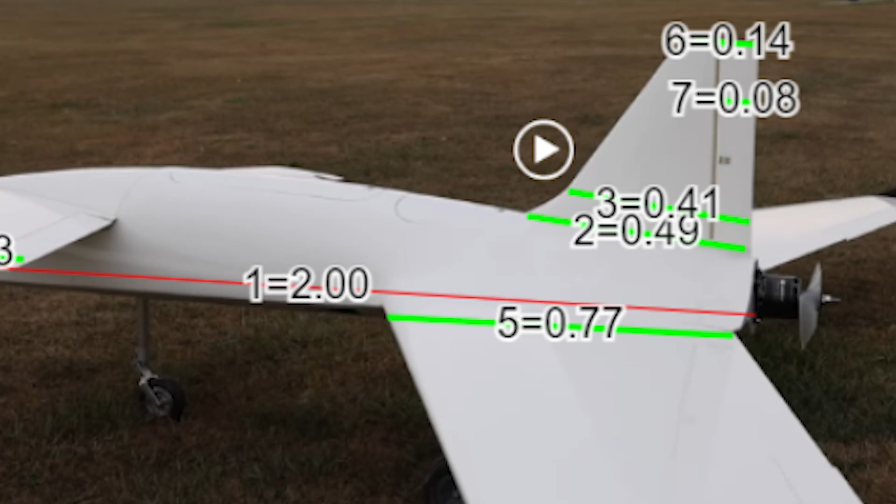Welcome to week 2. This week we are going further into the aerodynamics of this drone. Here's a very quick recap of week 1. I figured out which airfoil I should use. I went over the different drone designs and picked this one. I did some research on which electronics I should be using, and I handed all of this over to my friend Jordy, who is currently designing the drone in SolidWorks, which looks like this right now.

Today we will be finding out if this game is a cheap alternative to testing aerodynamics, if it will save time compared to professional programs, and how accurate it really is. Alright, it's time to start my very first investment ever in this company drone idea. This is a very official moment. Alright, I'm paying right now. I think I paid. Oh, I didn't pay just yet.

Let's make a new aircraft. I saw a lot of reviews of people on Steam that said that they took 2 days at least to learn it because apparently it's quite complex. Now it didn't take that long. I ended up only needing 2 hours before I started working on my actual project. The only issue with this game is that if you ever want to use this as well, be aware there's no Ctrl-Z, and that's really annoying. And it's a little bit buggy because it's in beta.

So you guys kind of understand what I'm doing here. I was trying to rebuild my actual drone already, the one from the intro of this video. And this is what it's currently looking like. So that should tell you how terrible I was at this stage, but trust me, it'll get a lot better. It was actually starting to look a lot more like the drone than it did before. So to be honest, without a tutorial, that's still quite impressive to me.

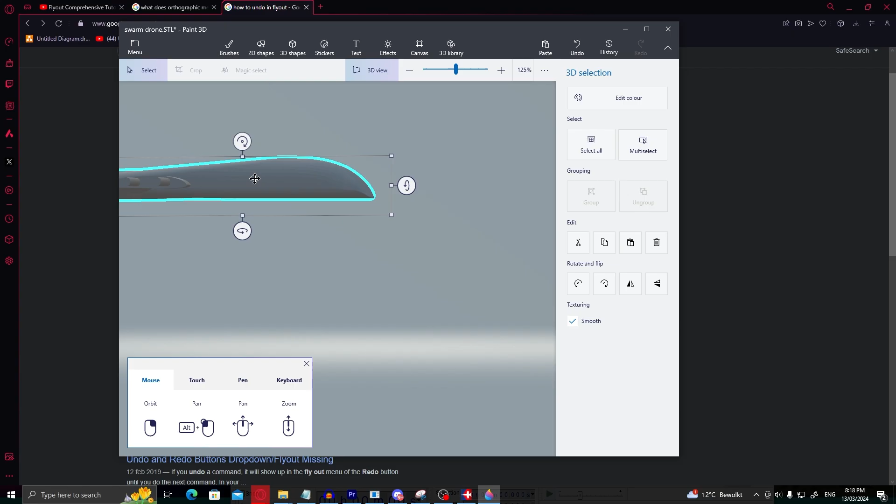So, whilst watching this amazing time lapse, I want to tell you about the other huge amount of progress I have made alongside this. And this was mostly possible by two amazing guys that reached out to me. Last video I asked people with experience to send me an email if they would like to help out, and of those 400 viewers I did get, 2 people reached out.

One of the guys is an Australian guy called Josh, and he was fascinated with UAVs as well, and because of this he gathered a ton of knowledge on this field and he generally knows a lot. He also has access to a few tools like 3D printers, and he has some experience using a CAD program.

The other guy is from India. He is at an engineering college and they have an RC plane club, and he's like the leader of that club. Together they've designed an RC plane and it looks pretty advanced. This guy has a very deep understanding of aircraft aerodynamics and physics. He also has 5 months of SolidWorks experience, and the combination of these two guys helping me out saved me so much time and allowed us to make so much more progress with developing this drone.

I will not keep you waiting though, so here's what we did. First, I introduced them to the project and showed them what I had already. The Indian guy recommended the Australian guy a professional wind tunnel program that he then downloaded. And I told him I landed on the Clark Y airfoil in the last video. Make sure to check out that video if you want to see more in-depth information about how I got to that airfoil.

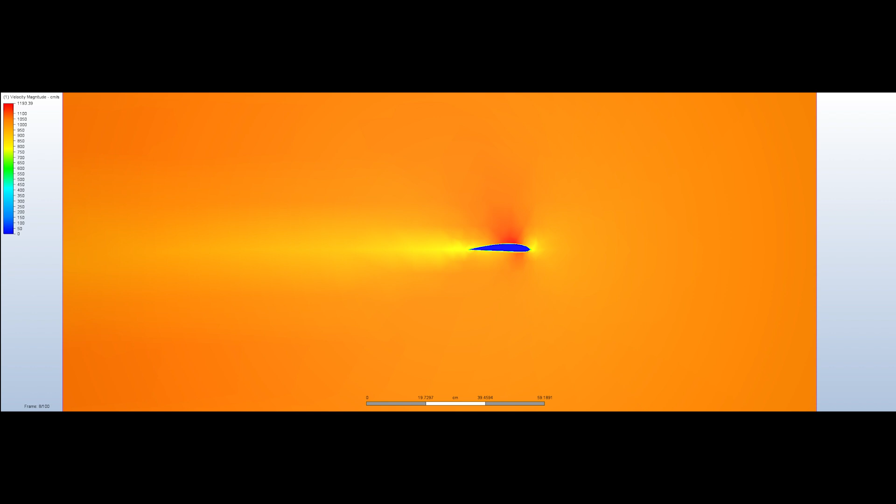And he put it inside of that wind tunnel program. Now, to me, these graphs are a little bit complex, but I think red is faster wind and blue is slow wind or drag. So this is the airfoil at an angle of attack of 0 degrees. The wind tunnel was flowing at 20 knots, which is 37 kilometers an hour, and for the Americans that's, I don't know, 3 yards. So the results weren't so great.

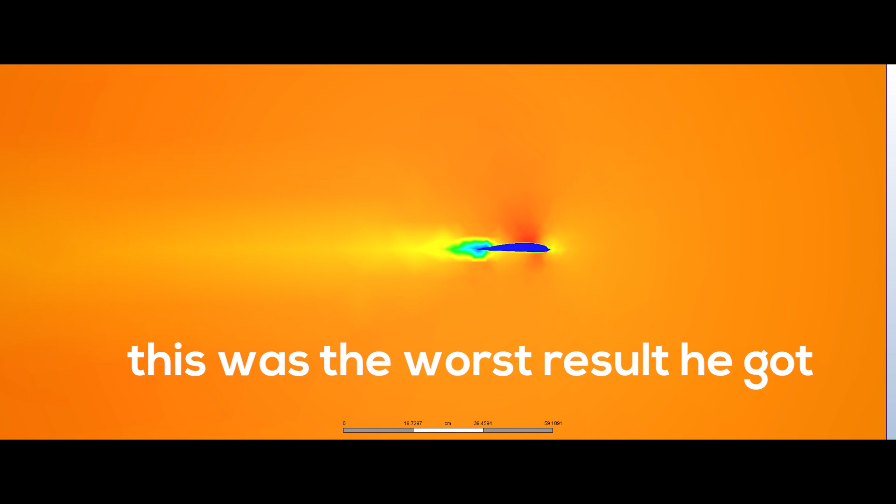1.8 Newton of upwards force and 1.49 Newton of force in the x-axis, and I think that's drag, but I'm not entirely sure. Wait, let me ask him. Okay, yeah, it's probably drag. So then he changed the angle of attack to 7.5 degrees, and he already figured out the Clark Y airfoil needs a pretty high angle of attack, and that was confirmed right away, as that performed about 5 times better with 8.9 newtons of lift and the same or slightly less drag.

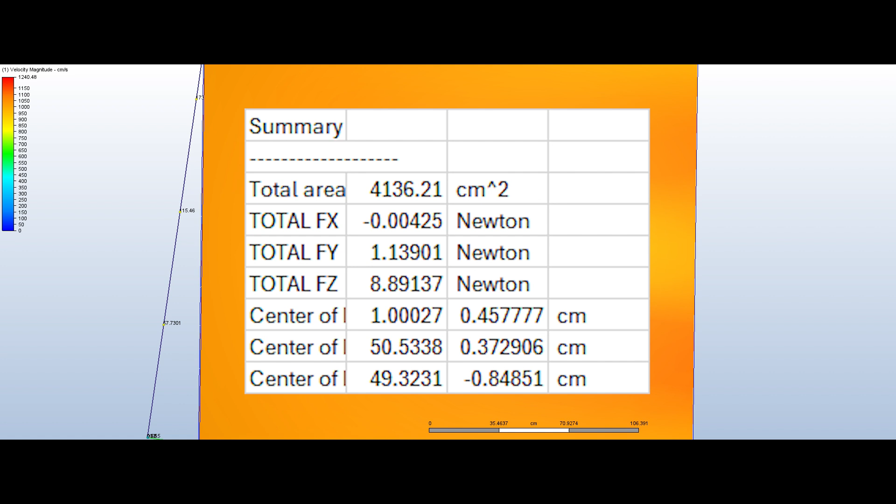The airfoil he simulated was 1 meter long with a chord of 200. So then, kind of as a proof of concept, he printed out a sample of a 100mm chord and a 250mm span and tested it in a wind tunnel, but it's kind of a makeshift wind tunnel. He just took a blow dryer and attached a string to it, and then he put the wing in front of that, and you can see the string really going down. And it's really cool to me that you can really see the force that is created by an airfoil. This way he was easily able to test out good angles of attack, so that's honestly amazing.

So after adding all of those measurements, I started adding a motor, and luckily they have an electric motor in this game, which is quite nice, and you can set the RPM and the torque, and also different blade types, and I don't know which one does what exactly. I still need to do research on stuff like that, but I just chose a random one.

Now to make the rudder real quick. I did the rest of the entire plane basically by guessing, by the way. I didn't use any measurements for the rudder. I did use that blueprint with the estimated measurements, but it ended up looking way too big compared to the real thing. So later on I just made it smaller, as you can see. Same for the front wing. I just had no idea how long it should be, so I just did something. So I added a few control panels, and I also just guessed it. I'm pretty sure that control panels are pretty precisely placed, and I didn't do that.

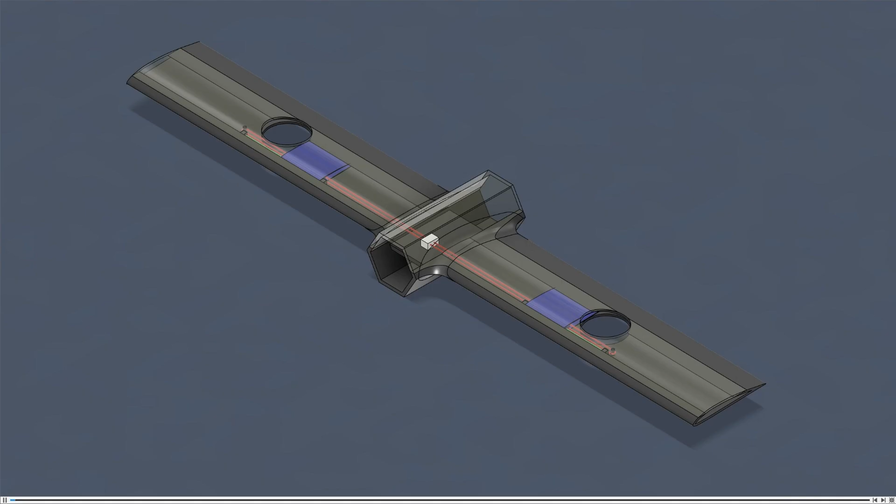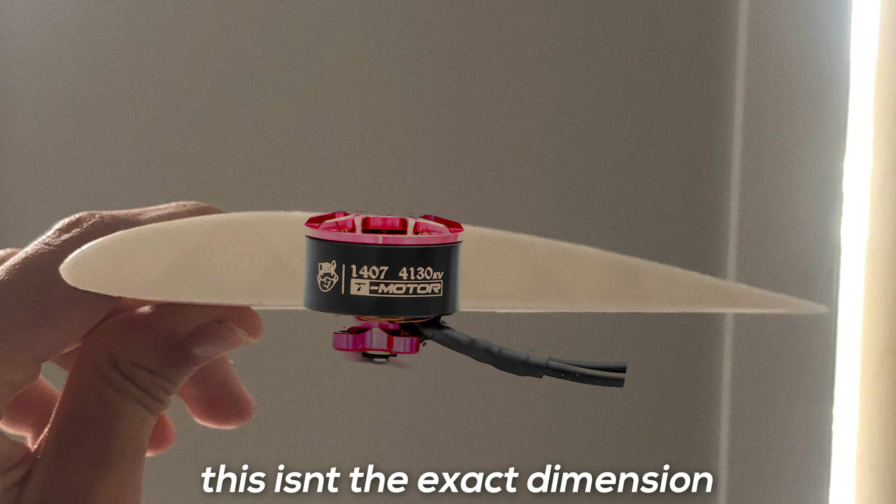We have to talk about the motor placement. Josh made a CAD drawing of a very simple concept to cover the VTOL motors in the wing. I like this idea and I thought of how cool it would be to have zero aerodynamic impact for the horizontal flight, even though it's a VTOL. But there was one problem. With the dimensions we currently have, I very highly doubt that the motors would fit inside of the wing, mostly because of the thickness of the motor compared to the wing.

This genuinely bugged me as I couldn't sleep until 6 AM that night and I kept trying to figure out solutions to counter this. And I came up with a solution that accidentally also had a bunch of other benefits, and at this point I felt like a genius. But the idea is quite hard to explain. So the next day I woke up at like 2 PM and started right away drawing a plan and making it in Blender. So here's my idea.

Like regular, we add the propeller in the wing, but not the motors. The prop will be attached to a belt that is driven by this gear that is turned by this small drive shaft connected to a motor inside of the body. This is the least interesting part. It gets better, but just know that I made this model very unreliable and stupid, but it is more about the concept of this.

So after adding that to the rear of the drone as well, you can add a system that allows the two rear motors to switch and drive a gearbox. Or you can do it with all 4 motors. Now I hear you thinking, combining the motors will only give more torque. And wasn't that exactly your issue?

Yes and yes. So with this fairly compact gearbox, it turns the torque into more RPM instead, and if you can do this with all 4 drone motors, you literally have enough power to explode the plane. Maybe. So technically that allows you to run all the motors at 20% instead of full throttle.

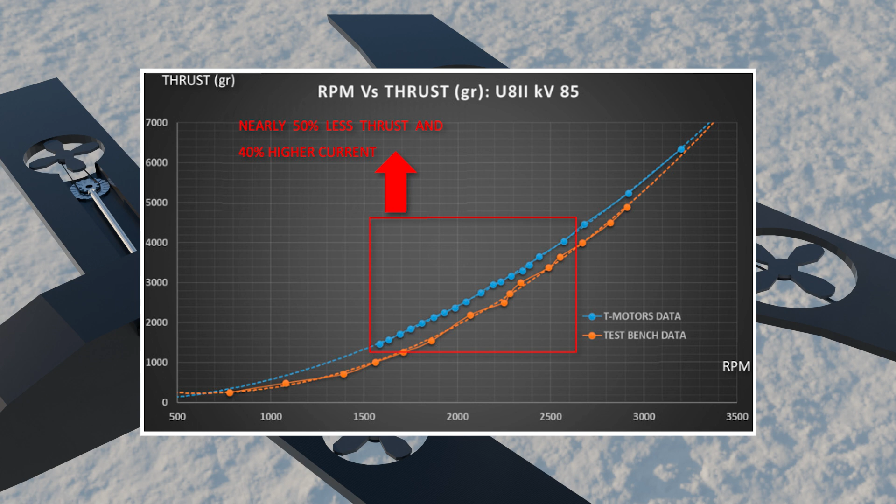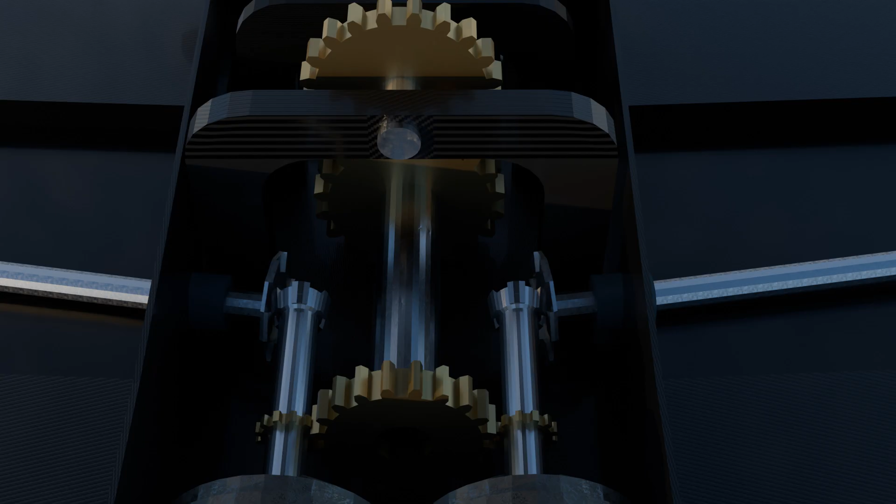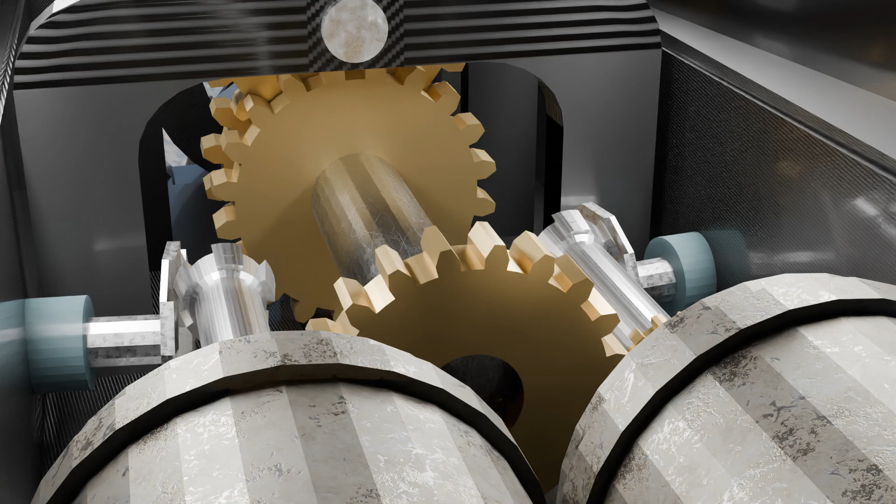You use the VTOL motors all of the time, because I mean you paid for them, might as well use them. You have an aerodynamic wing, and it has an extreme amount of engine power if you need it, which could add to the whole modularity plan of making the plane modular. We could just develop wings and props that are perfect for going faster, people can just put it on there and you have enough power already to go very fast.

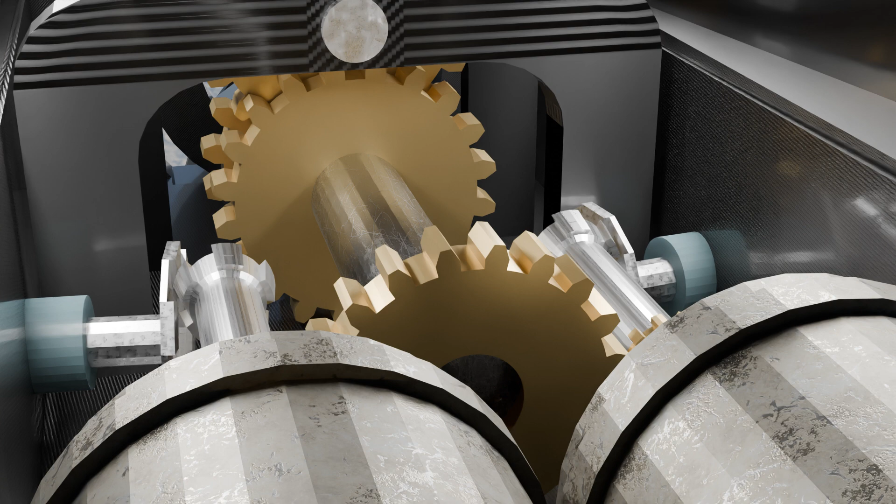I showed this to the boys and they pointed out some fair issues though, and I agree on them. First of all, a motor is more efficient at 20% because it generates less heat. Now, what happens if you put drone motors in an enclosed location right next to one another? You obviously get heat. I kind of thought of this and I added an air intake, but that's still not the amount of cooling that you would get with external motors.

So you can cool the motors of course, but that makes it slightly complex, and at that point you may as well get a separate motor and cool that one off. But this is all theoretical. We need to test out some stuff first, so we decided not to do it just yet and keep it in mind for the future or like a future model.